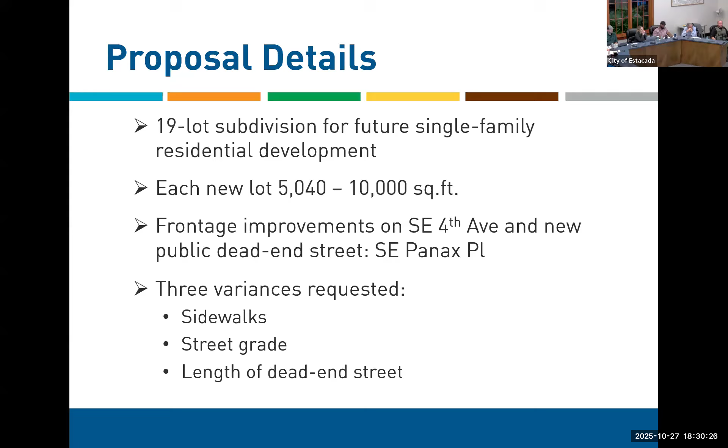Each new lot that's created would be between just over 5,000 and 10,000 square feet. It would involve frontage improvements to Southeast Fourth, and then a new public dead-end cul-de-sac street, proposed to be called Southeast Panax Place. There are also three variances requested as part of this application, regarding sidewalks, street grade, and the length of the new street.

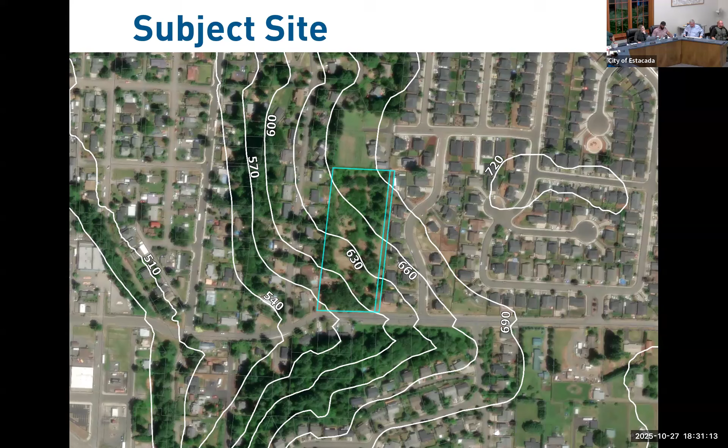I just wanted to talk about this - the white lines are the topographical lines that show elevation above sea level. What we have is about, let me check my notes, about 130 feet of elevation gain from the southwest corner to the northeast corner. So it's a fairly steep hill.

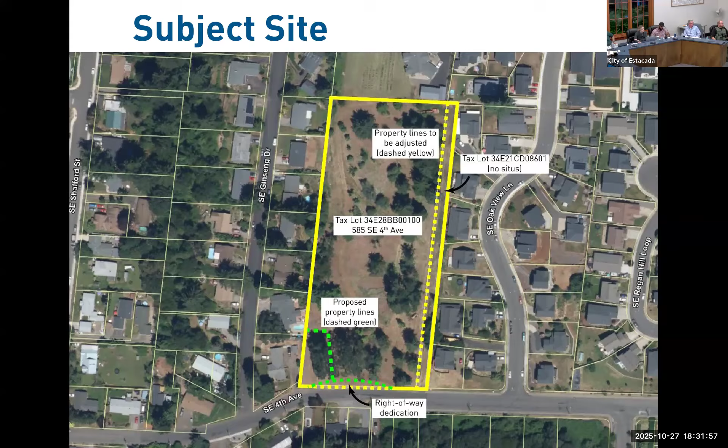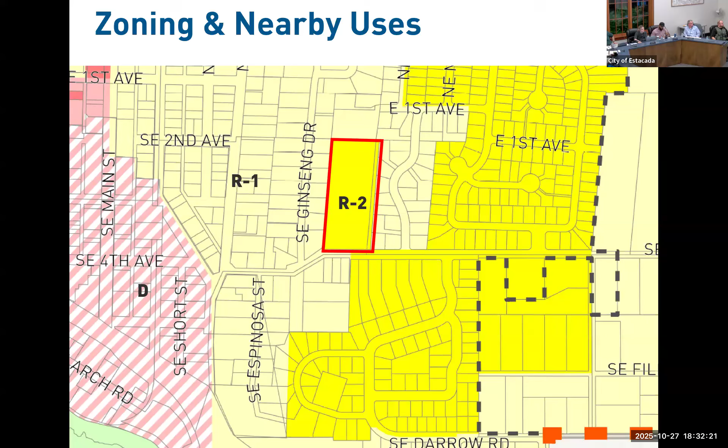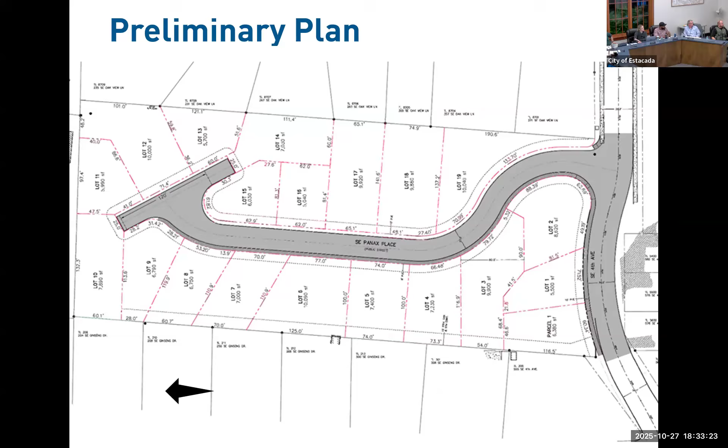Getting into the approval criteria, these are all the Estacada Municipal Code sections applicable to this subdivision with variances proposal. While the Planning Commission finds that all relevant standards can be met with conditions, I'm going to spend some time discussing the variance requests and the street designs and improvements.

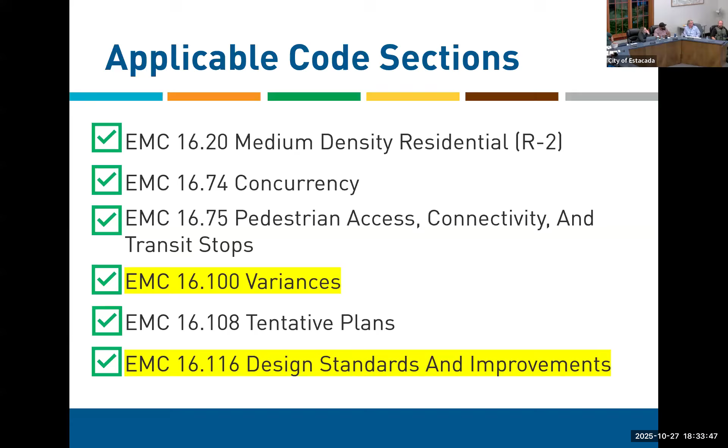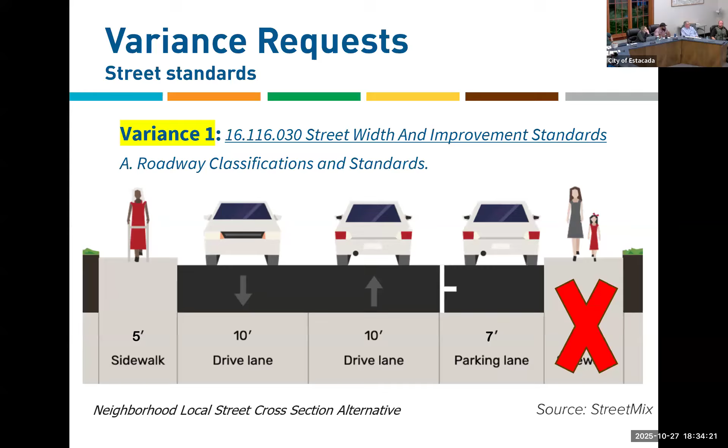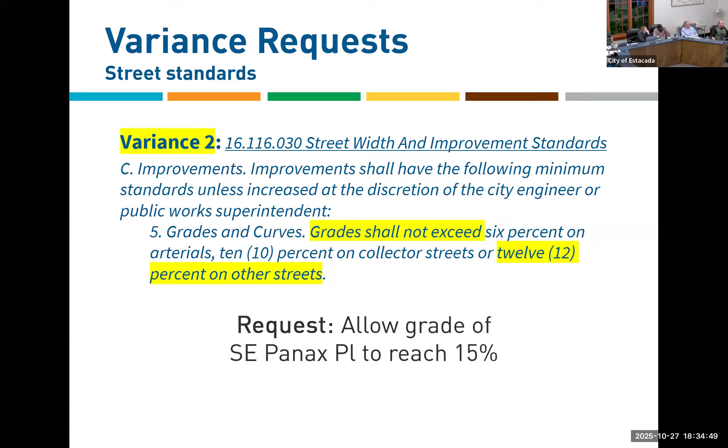Moving to variance 2, this regards the maximum slope allowed for streets in the city. Our standards say grades shall not exceed 12% on local streets. The request is to allow a grade for the new public street to reach 15% instead of 12.

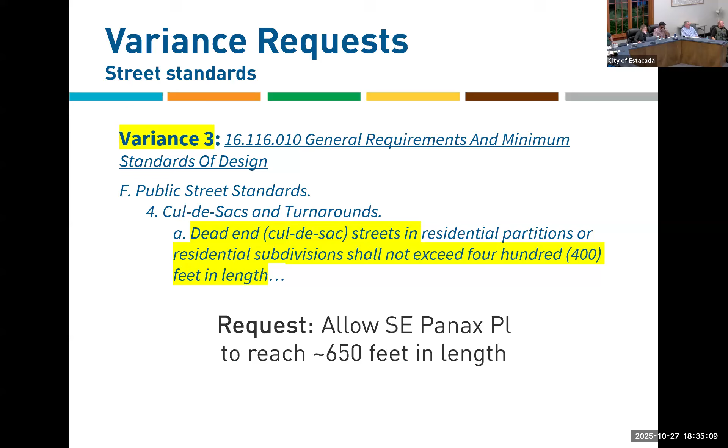The third request regards maximum length allowed for dead-end streets. In the city, dead-end streets in residential partitions or subdivisions shall not exceed 400 feet in length. The request here is to allow the new street, Southeast Panax Place, to reach around 650 feet in length.

Each of these requests is dealt with separately in the Planning Commission's report, with different reasons, findings, and conditions of approval for each. But for the sake of time, I'm going to present them as a bundle since the recommendation is the same.

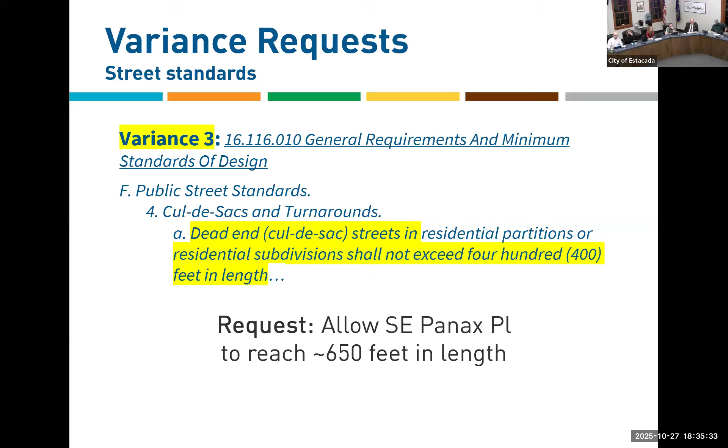We'll get into the actual criteria here. The city has a code section specifically for variance requests, and typically the Planning Commission makes final decisions on standalone variances. But because the subdivision design is dependent on the granting of the three variances I just went over, and members of council have expressed concerns with the requests, it isn't feasible to tease apart the variances from the subdivision application in that way. So I'll present the criteria that staff and the Planning Commission applied when formulating our recommendations.

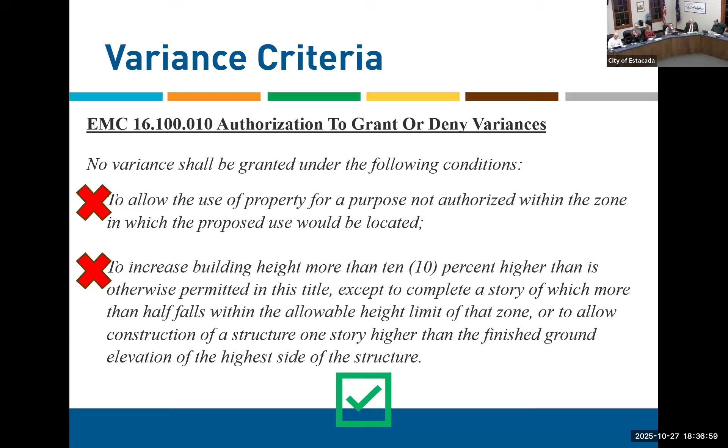This first section states when variances cannot be approved. Section A says variances cannot be granted to allow use of property for a purpose not authorized within the zone in which the proposed use would be located. The applicant intends to create residential lots in a residential zone, which is allowed outright, so section A does not apply. Section B says variances cannot be granted to increase building height more than 10% higher, or allow construction of a structure one story higher than the finished ground elevation, etc. The applicant is not proposing to build structures that exceed height limits, so section B does not apply. Because neither of these sections apply, the criteria for this section is met, and we can move on to the next section.

We'll go over it in detail. It'll make more sense in a second.

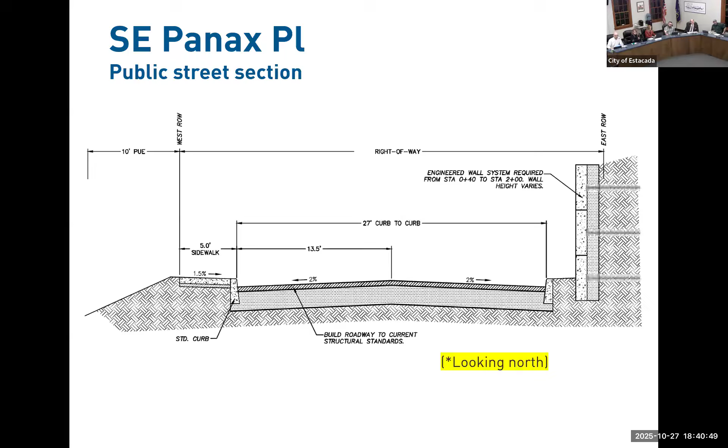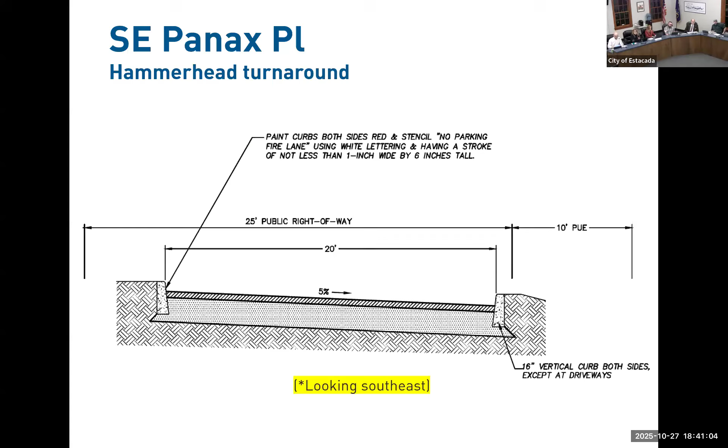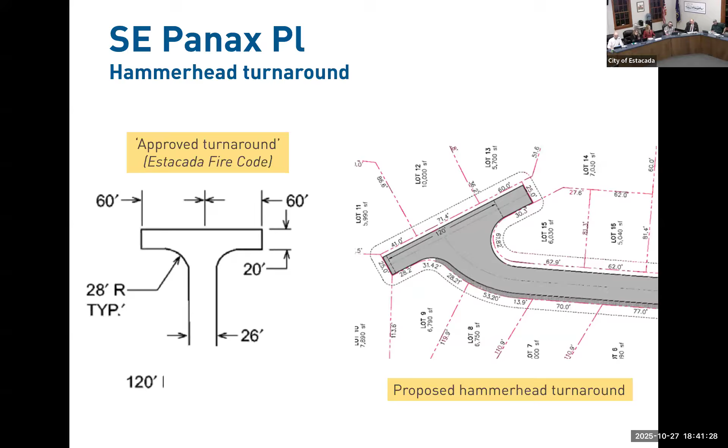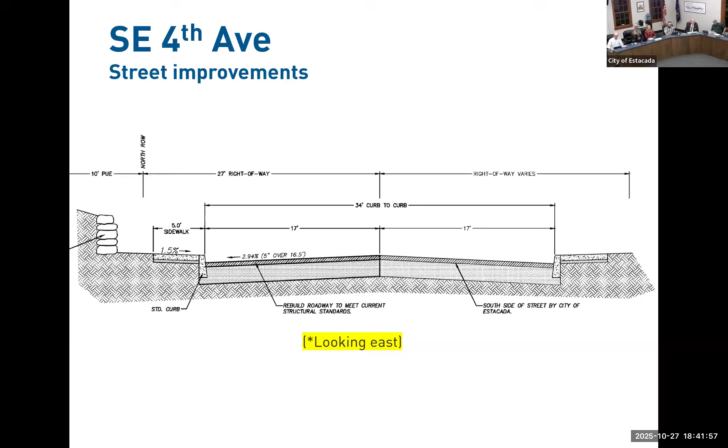Finally, the Planning Commission's recommendation: the Planning Commission finds that this application for subdivision with variances can meet all applicable approval criteria, and therefore recommends approval subject to the listed conditions.

I'm not going to read all the conditions for you, but this is a general summary: a new or updated geotechnical report would be required, and public improvements would be required, including sewer, water, etc.

Streets and sidewalks would be built to modified but acceptable standards. 10-foot public utilities easements would be required. Stormwater would be managed with a drainage plan, and sewer and water service would be extended up from Southeast 4th Avenue. Finally, all requested fire code conditions are included in the recommended list of conditions.

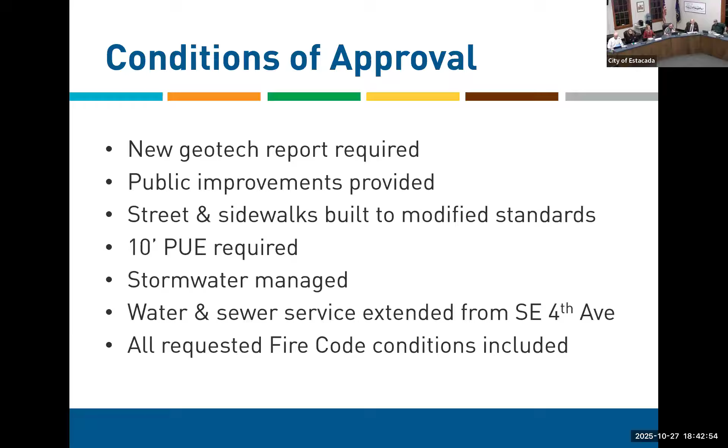And that pretty much concludes my presentation. So we can have public and applicant comment. I can field council questions, and I imagine the applicant team is eager to do that as well. Council can discuss, and then we will be looking for a motion to approve as I presented the application, approve with changes, or to deny with findings.

Okay, I will read a couple things here before we get to that point. Staff, is there any correspondence regarding the application at this time? There was a public comment, but that was from some time ago, I believe over a month ago. It's exhibit 10, so it's included, but we have not had any since that time. I've had correspondence with councilors, but not with other members of the public. Okay, thank you very much for that.

All right, I will now read a statement about evidence presented at the hearing. An issue which may be the basis for an appeal to LUBA must be raised prior to the close of the record at the final evidentiary hearing on the specific application. Such issue shall be raised with sufficient specificity so as to afford LUBA and the parties an adequate opportunity to respond to each issue. A failure of an issue to be raised at the hearing, in person or by letter, or failure to provide sufficient specificity to afford LUBA and the parties an adequate opportunity to respond to the issue, precludes an appeal to LUBA on the issue.

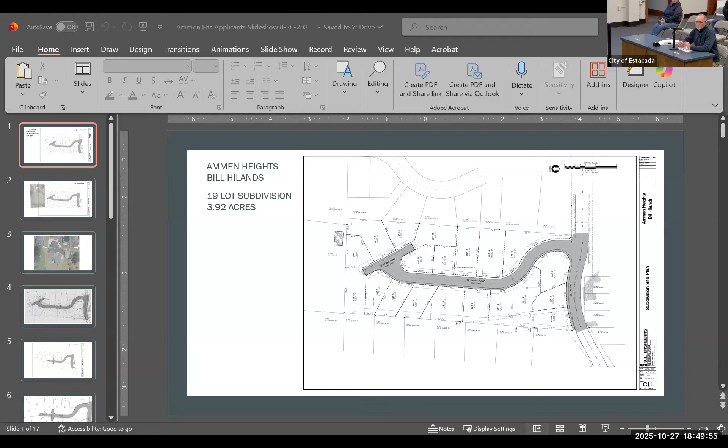So I have a question while they're looking that up, and it might be for the gentleman online. My understanding is there's a lot of clay in the hillside up there, and I'm concerned about digging too deep and excavating too deep, and then there being erosion, because we kind of live in a wet state. So that's a concern going through my head. You're talking about some pretty massive retaining walls, and my understanding is there is a lot of clay in the soil up there. I'm just concerned about erosion.

City of Estacada obviously has an erosion ordinance, and the DEQ 1200-C construction stormwater permit requirements will be applicable to this site as well. So we will have a very detailed erosion control plan submitted and approved by DEQ prior to any ground disturbance happening.

As far as the clay on the site, is it possible to pull in Ben Anderson and let him comment on that? Sure, he's up there. Hi, yes, this is Ben from GeoPacific. We're recommending that the retaining wall along the east side of the site be a soil nail wall, which is top-down construction and requires less disturbance of the soil, kind of alleviating some of those concerns.

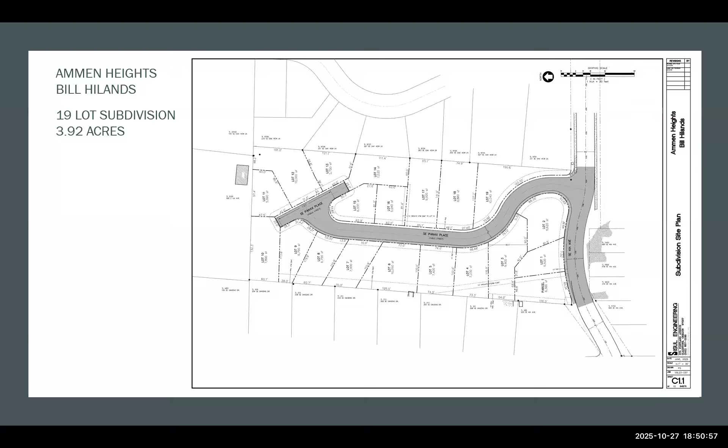Okay, thank you. I'll go on with the rest of my presentation if you don't mind. So, slide number 2, please. This is the site, and what we've added here is an aerial of the property offsite to the north.

At the bottom of the page, west of the site, is the Ginseng Heights subdivision that was constructed in the 1970s, and there is no street stub provided to the site. Then at the top of the page, in 2006, the Straight Line Estates subdivision was constructed, and also no street stub was provided west to this site.

Around that same time, in the mid-2000s, there was a plan for a subdivision on this site called Bird's Nest 2, and it more or less had a street running straight up through the site. I believe it was to connect into First Avenue up at the top that you see in the aerial image. That was a 27-lot subdivision with roughly 5,000 square foot lots, but it must not have penciled out, because it never got constructed either.

Then a few years ago, this area up on top was partitioned into 3 lots, and that prevents a through street going through this site and connecting anywhere else, because there are developments now around it on 3 sides. So that leaves the only way to develop this site is with a dead-end street, which obviously complicates the lot and development pattern.

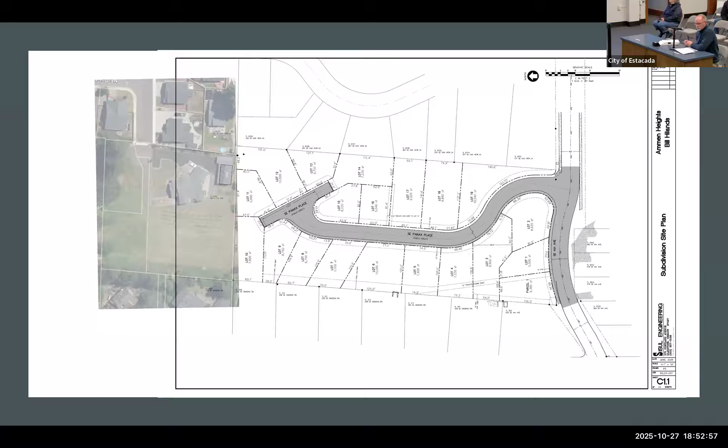Next slide, please. This is a close-up of the area at the top. This photo is actually from a few years ago; now there are actually homes on all 3 lots, either built or under construction. You can see the configuration of their driveways, and there's now a home on lot 1 that's pretty close to the driveway on lot 2, so that prevents any connection from going that way. Thank you.

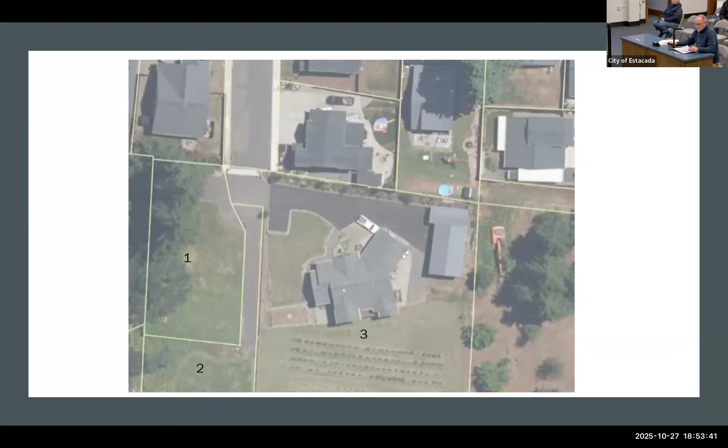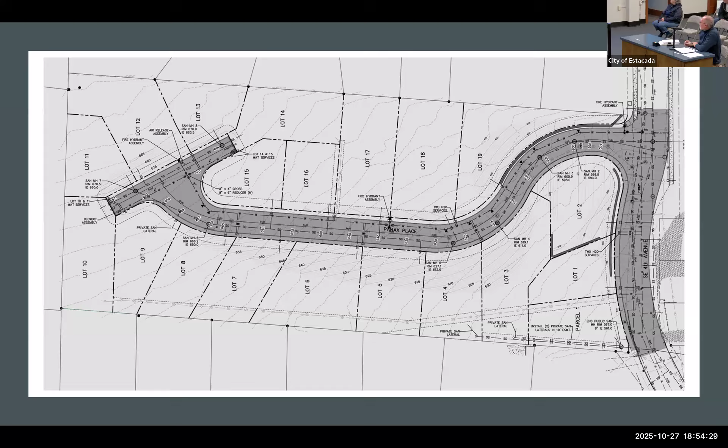Next slide, please. So this plan shows the subdivision that's before you tonight. It ends in a hammerhead, an approved turnaround for the fire department and the city, and this hammerhead has been turned to follow the natural contours of the site to reduce grading. You can see there's lots accessing all around the hammerhead and on both ends.

Next slide, please. So this is the 12-lot subdivision plan that came before the city council last year. With this plan, the public street ended here, and the reason it ended here is because that was the 400-foot limit that by code the public street can only go that far.

And beyond that, this was going to be a fire truck turnaround, and then this is 150-foot private road. The reason it was limited to 150 feet is that if the fire trucks go more than 150 feet, there has to be another turnaround for them. Turnarounds are difficult on this site because by fire code, they have to be at 5% or less. So as we're trying to climb this hill, flatten out, then start going back up and flatten out again, we just get in too deep of a hole at the top of the site. So extending a private road wasn't an alternative.

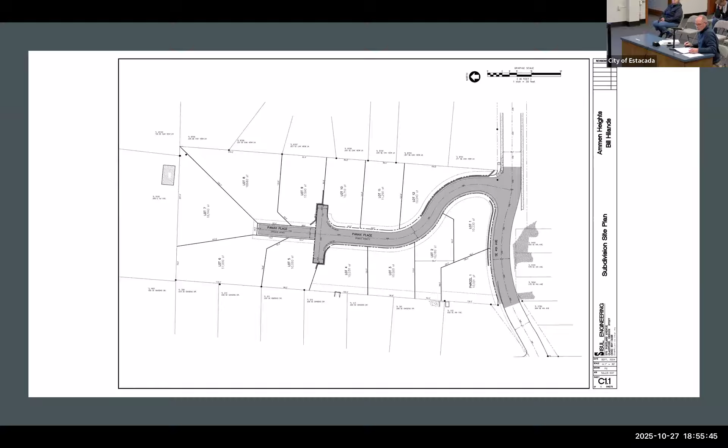Let's go ahead and go to the next slide. So this is a close-up, and you can see that these lots are oversized up here - 10,000 square feet, 17,000, 17,000 plus, 18,000, 10,000 - real big lots at the upper end of the site. The reason for that is we had no other way to get a road up there to create more lots. So that's why that plan was designed like it was at the time.

This is an R2 zone. Minimum lot size is 5,000 square feet. And we had lots that were approaching 20,000 square feet with the previous plan.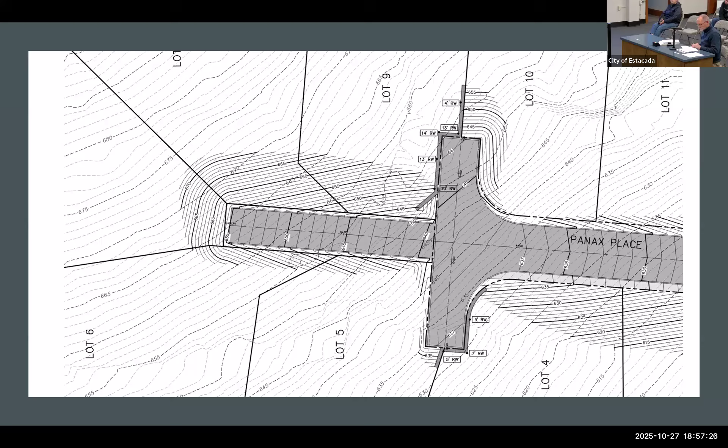Next slide. So this is the new subdivision plan. The design takes Panax Place intersection off 4th Avenue at the highest end of the site. If this road were to extend out here, this intersection point is 20 feet lower than this point. So that's why the road has been moved to the higher part of the site, so that we can try to use that grade to limit cuts and fills going up through the development site.

I should say limit cuts going up through the development site. So there's a bit of a swing here in the road. And this allows us to have a little more run. More run means we can pick up more elevation, also helps.

And the reason it ends in a hammerhead is because for a cul-de-sac to be placed here, that cul-de-sac has to have 102-foot diameter from back of sidewalk to back of sidewalk, or back at one sidewalk. Let's assume a one sidewalk design. So from curb on the one side of the cul-de-sac to the sidewalk on the other, 102 feet.

And as I said before, the fire department limits the slope in a turnaround to 5%. So we could only get about 5 feet of grade change across a 100-foot cul-de-sac. But the natural grade change in that area of the site is 25 feet. So the cul-de-sac creates a 20-foot grading issue for us up there. We have to make up 10 feet on this side of the cul-de-sac and 10 feet on that side of the cul-de-sac.

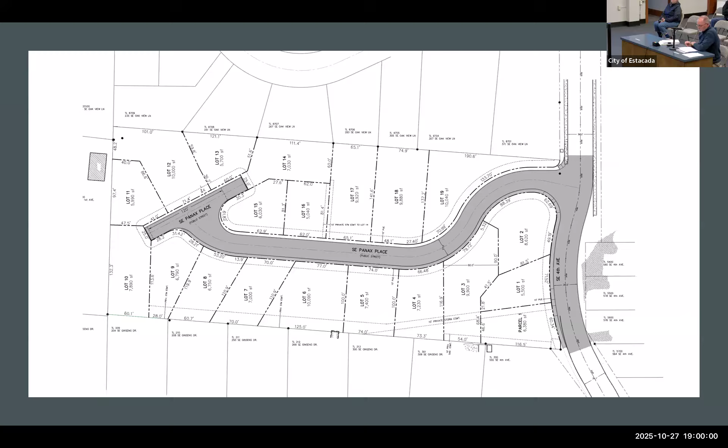And then variance 3 is to have this public street being more than 400 feet in length to the dead end. Next slide, please.

So this is station 600 right in this area. So Alan said 650 feet long. It's a little bit less than that, depends upon where you measure to. Station 0 begins in the center of 4th Avenue. So it's certainly beyond the 400 feet, but I would say it's less than the 650 feet.

We feel that this design is a better overall design for the neighborhood than having the turnaround in the middle of the site. It creates a more seamless neighborhood and provides better access to all of the lots. Next slide.

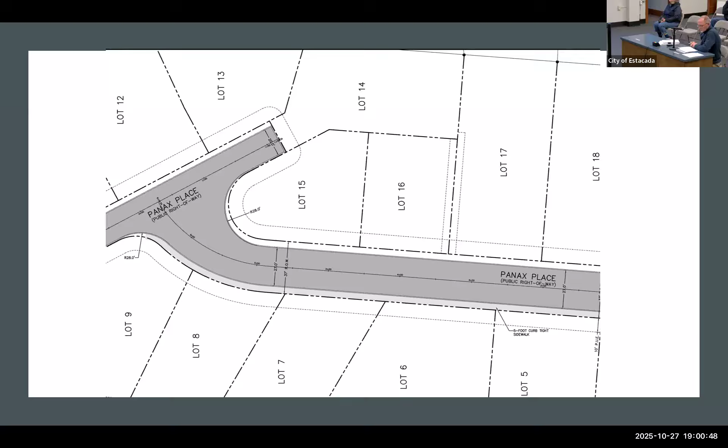So again, this is a little blown up diagram of the grading. Again, you can see how the hammerhead is more turned with the contours to better fit with the terrain of the site. Next slide.

This is the, Alan showed you the cross section. This is the turnaround grading. It's just 1% in each direction, very flat up on top for that fire truck to turn around.

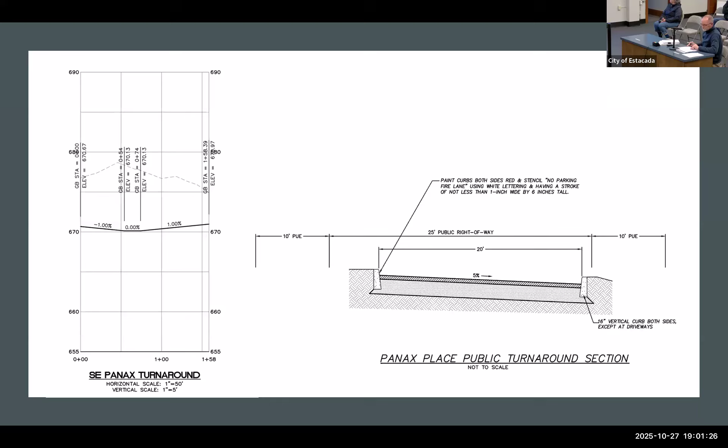So this is the 4th Avenue improvements, and two high priority safety improvements are included in the TSP and will be completed by this project. One is the widening of 4th Avenue. The other is for a sidewalk along 4th Avenue.

This area in gray will be the new pavement. And then you can see this hatched area here, basically that's all new road that isn't there today. So basically from this point up, that's all new. In places, this road is currently as narrow as 22 feet, and it'll go to 34 feet. So it'll be 12 feet wider after development.

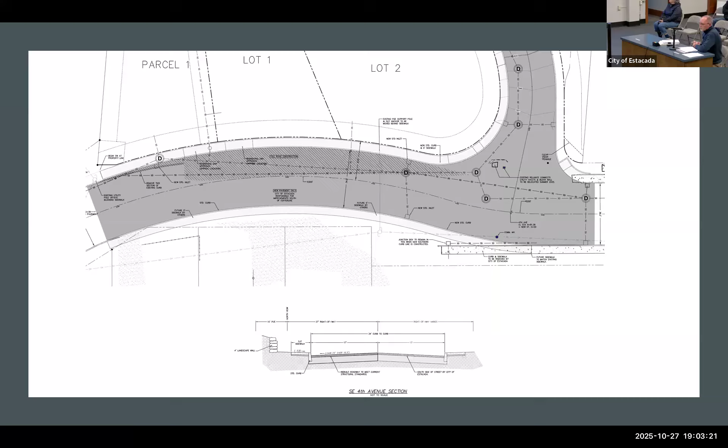There will also be a 2,100 square foot dedication by Mr. Highlands along the frontage of the site. Next, this is a view of the 4th Avenue profile.

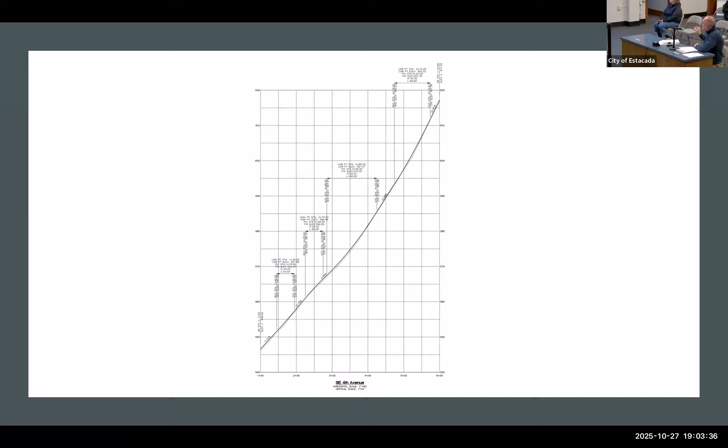In the profile, below the site is in the neighborhood at 10 to 12%, increasing up to and beyond 20% beyond the site to the east, up toward heading up toward Mountain View. Next slide.

This shows that at the intersection with Panax Place, it'll be a 16% grade in 4th Avenue right at the center line intersection. By the time you get up to the east property line of the property, it's almost 19%. And then about 50 feet or so off the property, it gets up to 21%. So those kind of explain the grades that are up in this neighborhood and some of the grades of the existing streets.

That's all I have for you tonight. I'm happy to answer questions. Bill Highlands is here. He'll answer any questions that you have. And of course, we have Ben Anderson for another 20 minutes or so. Okay, let me pass this off to the councilors at this point and see if they have questions. I'll start off with you.

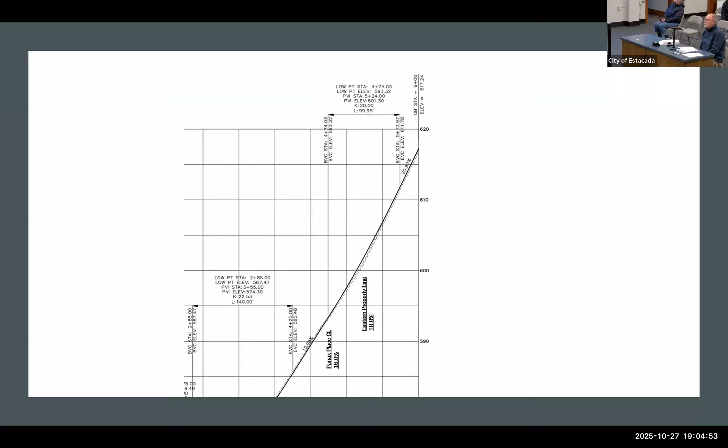Okay, the first thing I saw, because actually one of my first jobs as a kid was pushing wood up to the top of these real steep sites. So that was my experience. Other than that, I've got none. I'm a layperson, so the context of where all my questions are coming from is just worried about landslides. Steep hill, having that come down across a very narrow street and taking out the houses below. So that's where everything is coming from.

So when I saw the change from 12 lots to 19, I envisioned the entire place just bare earth. My understanding is bare earth with rain and all that kind of stuff is more susceptible to slides. There's been lots of examples, not necessarily around here that I know of, of hills coming down and that sort of stuff.

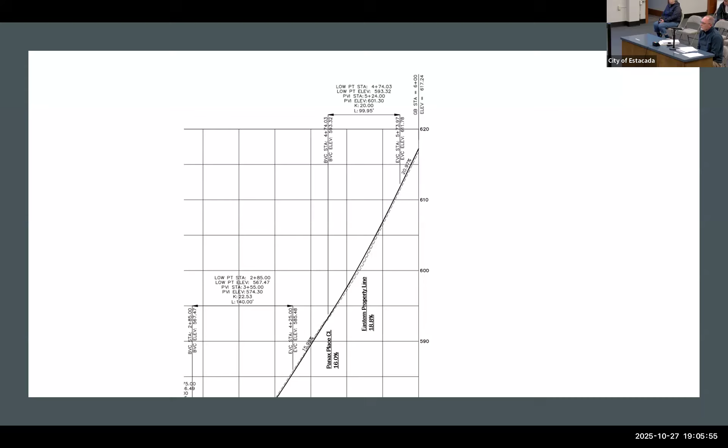So then I did my deep dive into the document. A couple of things, in no particular order: I didn't particularly see this, but it's the landslide susceptibility graph. I don't know if Mr. Anderson can see this stuff, but it shows, I think, that the site has a high susceptibility to shallow landslides.

Just again, for the graph. Yes, I have the map in front of me on paper. I can't see it on the screen, but that's a regional map, not based on anything but grades and regional geologic maps. When we studied the site and actually looked at the subsurface profile, the soils are quite stiff and more resistant to landslides than the regional mapping indicates.

So then, I'm not sure, because on the other side of this graph it shows the deep landslide susceptibility, and there it's moderate susceptibility to deep landslides. But what you're saying is this doesn't correspond to what your findings are on the site? That's correct. The regional maps give a general idea of what the area can be like, and then it's up to the engineer and geologist to do an in-depth study of the actual site conditions.

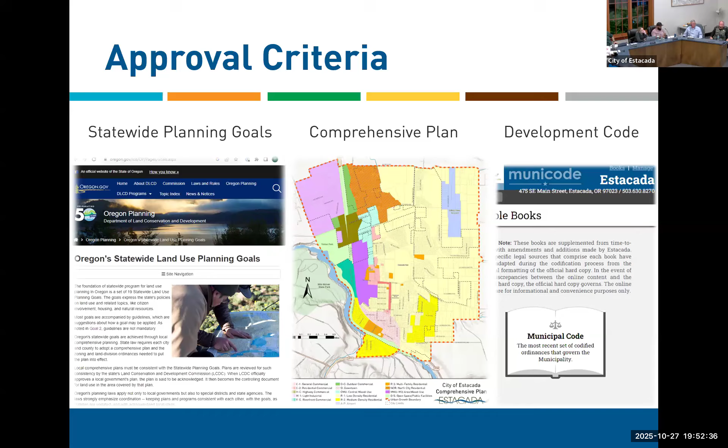All right, so we'll get into the approval criteria. In order for council to adopt this ordinance, which involves amending the city's development code, all relevant approval criteria must be met. In this case, that includes statewide planning goals, Estacada's comprehensive plan goals, and chapter 16.128 of the development code. I'll start with that chapter.

So that's 16.128. There are 4 sections, and here is the first: it stipulates that legislative amendments may be initiated only by Planning Commission or City Council. These amendments were initiated by council, so this criterion is met.

Okay, and these standards outline the procedure that must be followed when amending the development code. We are essentially performing these steps right now, and so these criteria are being met.

Okay, so we are also in the process of doing these things, which is: findings shall be made in writing and made public. The Planning Commission has done that, and at the end of this hearing, findings will be made by City Council in support or in denial of this ordinance. So we are working through this as well.

And then finally, this criterion requires that no application for an amendment to the development code shall be considered by Planning Commission within a 1-year period immediately following a previous denial of a similar request. So no similar amendment has been proposed and then denied in the past year. So this criterion is met.

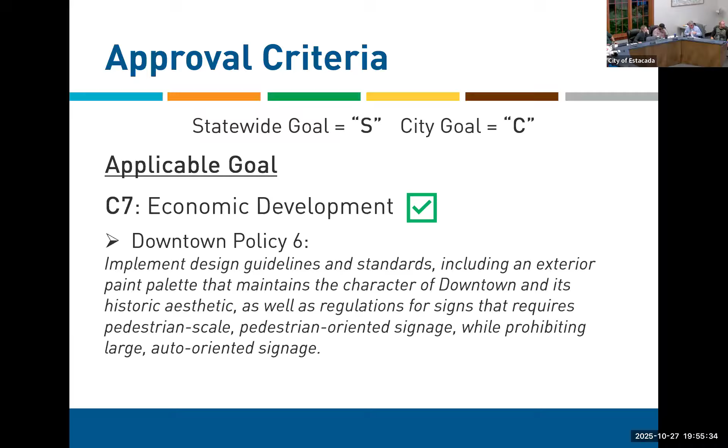By clarifying existing sign code regulations that require pedestrian scaled and oriented signage and prohibiting some large forms of auto-oriented signage, this ordinance supports downtown policy 6. The Planning Commission finds that these amendments are consistent with chapter 7 of the comprehensive plan, and is recommending approval of this ordinance without any conditions of approval.

So next steps are, I will field any questions. If there's anyone in the public that would like to give testimony, they're free to do so. Council can discuss, and then it'll be time for a decision.

Okay, I'll just read this statement before we go any further. Is there any correspondence regarding this application at all? I do not believe so, no.

Okay, I will now read a statement about evidence presented at the hearing. An issue which may be the basis for appeal to LUBA must be raised prior to the close of record at the final evidentiary hearing on the specific application. Such issue shall be raised with sufficient specificity so as to afford LUBA and the parties an adequate opportunity to respond to each issue. Failure of an issue to be raised at the hearing, in person, or by letter, or failure to provide sufficient specificity to afford LUBA and the parties an adequate opportunity to respond to this issue, precludes an appeal to LUBA on that issue.

Does any member of the audience wish to speak? I don't have any speaker forms, so there's nobody talking on this. Does staff have any additional stuff they'd like to add at this point? I don't think so. Okay, I will now close the public hearing and reopen the city council.